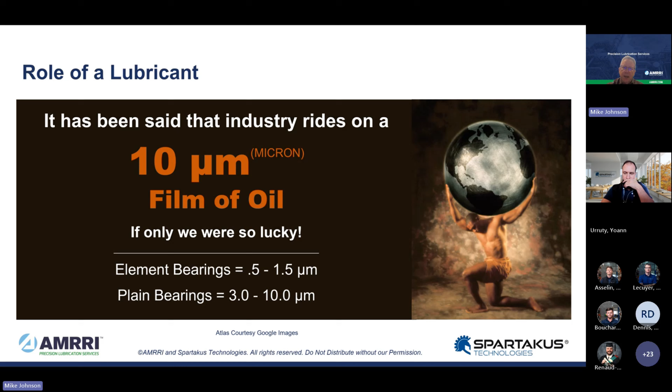All of our element bearings and any machine with rolling contact actually survive on an oil film between half a micron and 1.5 microns thick. Journal bearings and sliding surfaces get a relatively more luxurious 3 to 10 micron thick film—both precariously thin layers of protection. The reality is that we are attempting to float our industrial world on an oil film that's the thickness of a red blood cell.

On the one hand, that does work and we get plenty of benefit from it. On the other hand, it is a fragile film.

The activities of your folks at the plant site, whether lubrication technicians, mechanics, or operators with the oil pail and grease gun, are all about trying to provide a continuous coating of fresh, clean, dry, properly selected lubricant that cushions, seals, and protects machine surfaces from wear and corrosive degradation. If we're able to do that, we win.

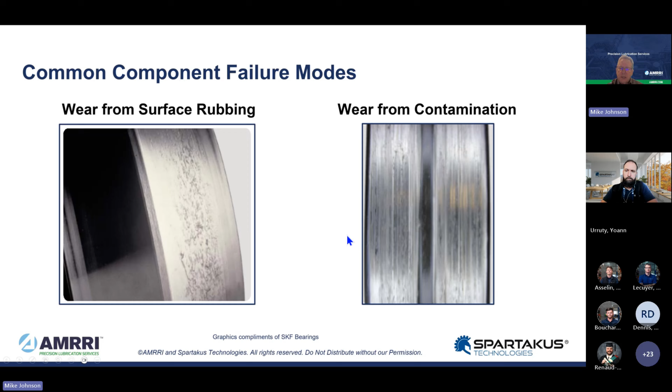If something occurs in our daily care and feeding cycle that disrupts that red blood cell thick layer of protection, we experience wear from surface contacts, bumping and rubbing. That wear debris, which is a contaminant, produces more wear in the form of abrasive degradation of surfaces, all of which leads to fatigue. And depending on the environment, there's also the constant challenge of corrosion of machine parts.

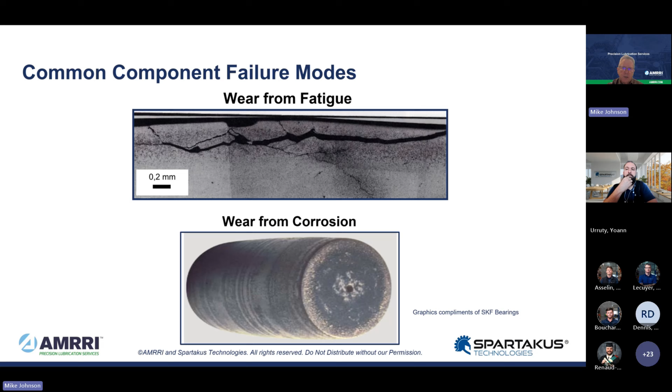These degradation modes all impact our ability to produce. It doesn't really matter whether our losses are scheduled or unscheduled repairs—once time is gone, it's gone, and we can't get it back.

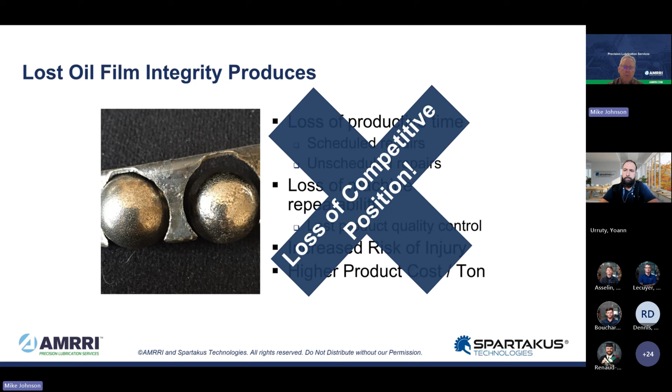With the loss of machine part function, we lose machine repeatability, which can impact product quality and cost control. We have increased risk of injury anytime we are scurrying around trying to accomplish repairs—urgent work makes for higher risk of injury. All of that amounts to higher product cost per ton of whatever we are producing, and that erodes our competitive position in a super competitive industrial world.

Our component suppliers are well aware of the predicament we face. Per SKF, they look at premature bearing failure as bearings that don't reach the L10 life cycle, and attribute 57% of those failure instances to something gone wrong with the machine lubrication approach. Inadequate lubrication is kind of a bucket of excuses.

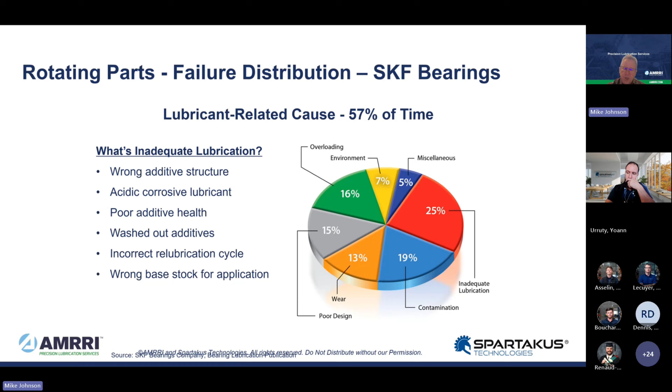Contaminant specifically refers to sump pollution. Wear specifically refers to degradation of machine surfaces due to the lubricant not having the guts to provide protection as expected. FAG, Schaeffler FAG bearing says, wait a minute, not so fast.

It's actually worse than that. Per Schaeffler FAG, lubricant-related cause shows up in 80% of instances of premature bearing failure, in the form of liquid and solid contamination, insufficient lubrication, unsuitable lubricants, or lubricant left in the machine for too long a period of time. These are basics we should be attending to with our daily care and feeding programs.

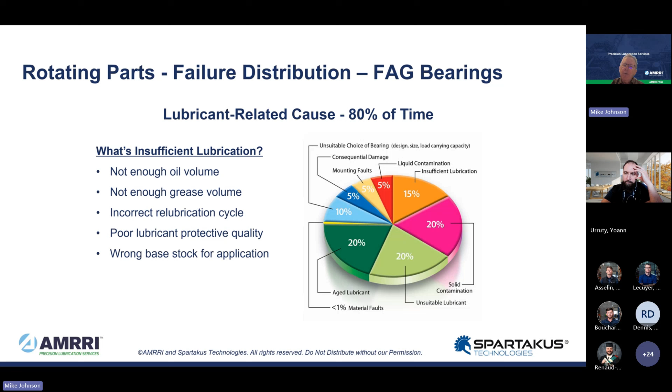Whether it's 57% or 80%, I don't know. But if both of those numbers are wrong by half, it still represents a controllable failure mode, and we have the means to do something to change that outcome. The failure modes we face are measurable, predictable, and avoidable.

We can control those challenges we face with routine operation of the machine. Okay, so now the question: so what? With all the things we have to do on a day-in, day-out basis, why should we put a lot of time, effort, and energy into trying to make machine lubrication work plans better?

What's the benefit? Beyond that, what should you expect following deployment of a reliability-focused machine lubrication work plan?

Reasonable expectations: a 25% reduction of lubricated machine parts over a 3-year period, with a big, hairy, audacious goal of 50% reduction in lubricated machine parts. And with all of those machine parts, any labor associated with repair, any contract labor associated with repair, and certainly reducing the risk of planned or unplanned outages.

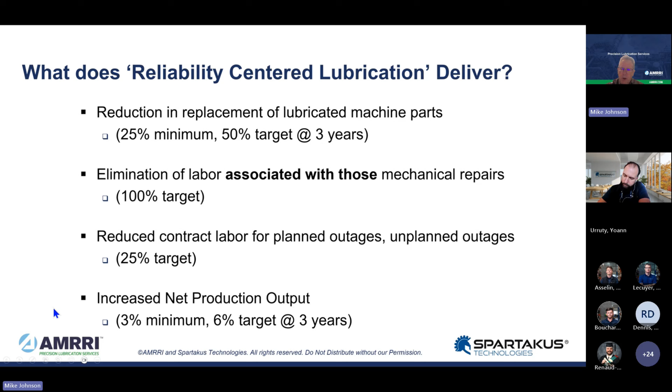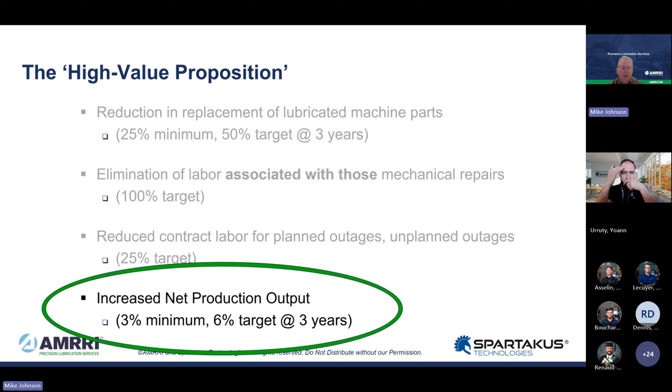Ultimately, while these top 3 bullet points justify the effort it takes to make a lubrication plan, our focus ought to be on improved production output, improving the productive capacity of our operating complex. A 3% minimum over a 3-year period is entirely reasonable. If we can reduce failures enough to add 3% productive capacity back to our existing effort, the net benefit changes our competitive position entirely within our industry, whatever it is we're competing in.

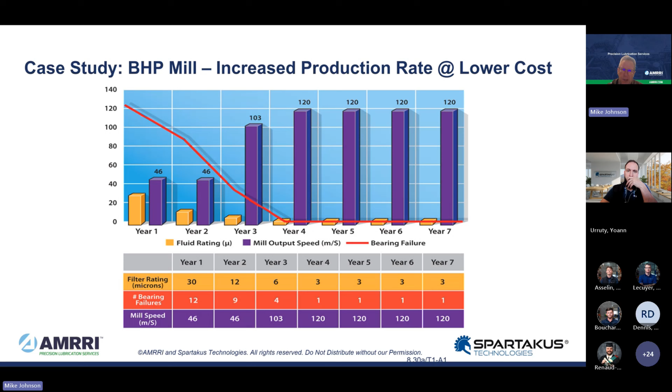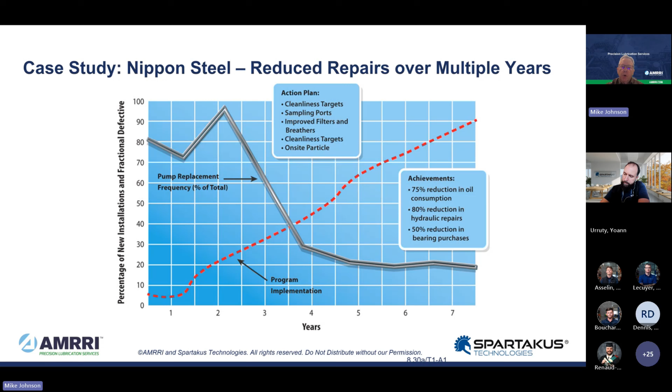Perhaps it's just hard, cold dollars. Here's a study showing 3 years following an overhaul of the machine lubrication program. The work was done in 2015, and benefits were accounted for in '16, '17, and '18. Our financial teams are interested in the power of the investment in terms of returned money. So the bottom line: 3-year improvement expenditure was $500,000, 3-year estimated savings were $8,800,000 - a 1,553% return on investment. Sometimes it's just about the money.

Machine lubrication work practices improvement is truly a best-buy industrial cost savings opportunity.

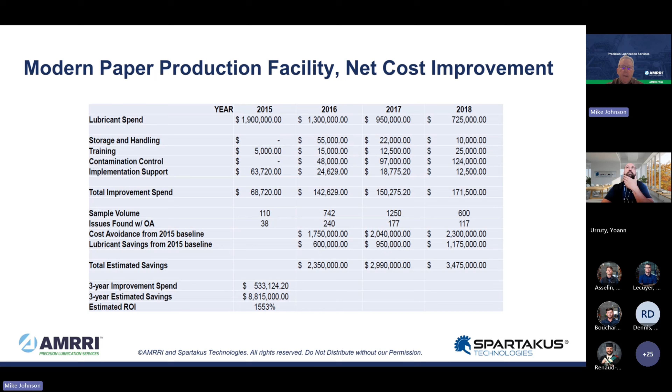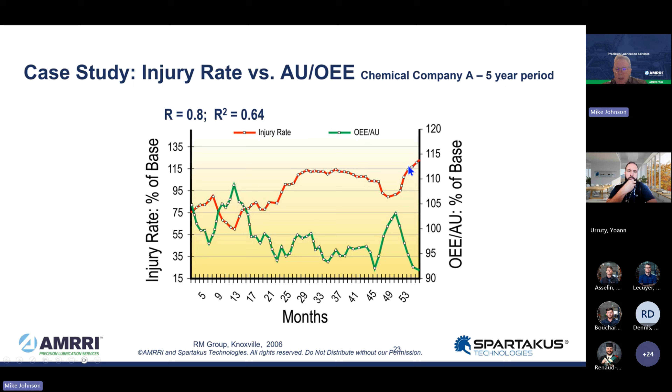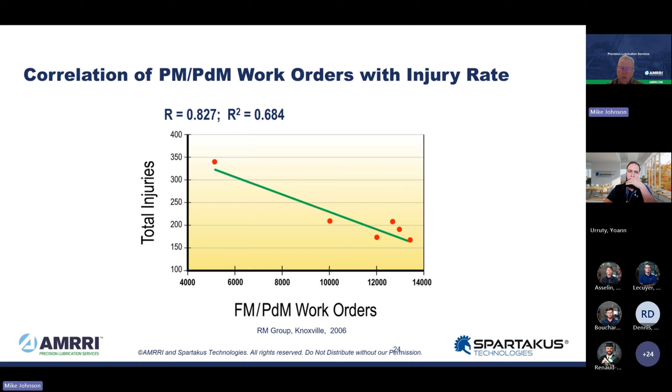There's also a safety improvement element - a well-established relationship between asset utilization, the green line here, and injury rate risk. We know from plenty of examples that as asset utilization improves, the risk of injury declines. This chart shows the opposite is also true: as asset utilization, measured by overall equipment effectiveness, declines, the risk of injury increases. There's a strong correlation between PM/PdM work orders, such as machine lubrication, vibration data collection, and inspection, with minimizing risk of injury, and a strong correlation between reactive work orders and increasing the rate of injury.

As you think about these potential benefits and your competitive position, and your work injury incidence rate, you've got to holistically look at your whole maintenance program and ask: what is our system providing for us? Per W. Edwards Deming, your system is designed to give you the results you get today. If you want different results, you've got to think about the system.

So with regard to improving machine reliability and overall maintenance through lubrication program development, it's a step-by-step exercise. None of this is necessarily easy, but it's all entirely accomplishable. Step 1: measure the current state of affairs.

Step 2: build a plan following that measurement, come up with a plan for development, and then step into that plan. Often, for the purpose of our presentation today, it involves taking a fresh, hard look at what products we've selected, how often, how much, and how we'll go about conducting daily care and feeding of our machines.

Step 3: use an oil-based sampling program to create a feedback loop, giving us an understanding of whether we've accomplished the objectives defined in Step 2. Step 4: make necessary capital improvements - there's a lot that can be done at very low cost to improve overall reliability of the machines. Step 5: consider upgrading the overall knowledge base of folks involved in this operation of our maintenance routines.

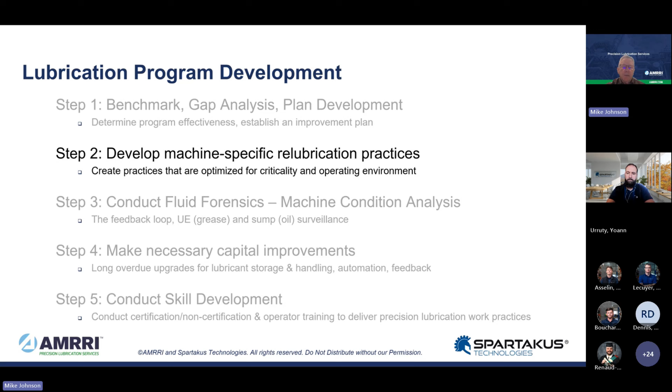Let's focus on Step 2 for a bit. When we step into reorganizing the machine lubrication care plan, you've got to realize it's a detail-intensive activity. We're going to gather a lot of information about the machines, their components, size, shape, speed of components, and operating context. We need a way to manage this large amount of information that will drive the decisions we make to improve things.

Secondly, whatever we come up with needs to be focused on machine health first, and the lubricant choice second. Traditionally, lubricant vendors have provided these kinds of work activities, and as it is their right and responsibility, it tends to focus on what lubricant goes where. But a thorough machine lubrication program goes well beyond just what lubricant goes where.

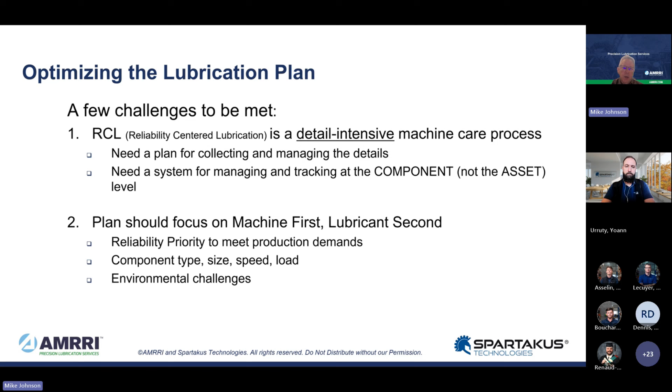So we start thinking about the machine, we have to dig into the machine details. What details do we need to build a new plan? And then beyond that, as we think about the details, we should ask the question, how much time do we need to accomplish these details that we're going to be presenting as a new basis for daily care and feeding?

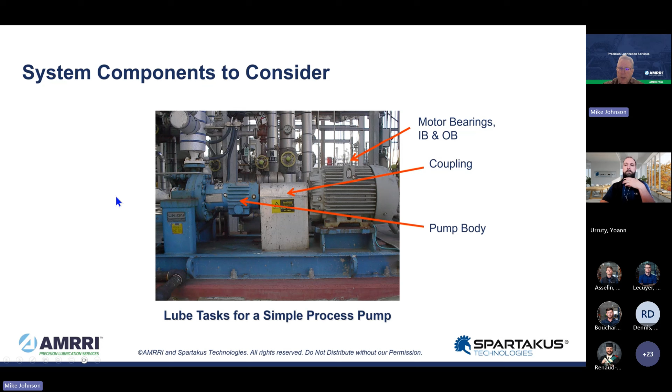When we start to tabulate the tasks that must be completed for any given asset, we look at the sub and sub components. We've got a motor that has two bearings, and let's assume just on average, we're lubricating the motor bearings twice per year. So we have 4 events, and each event requires a time allocation. The coupling, 2 events per year, and a time allocation for those.

The routine level check and top up, it's very common for folks to do level checks on a weekly basis. So we get 52 events, typically getting a 2 to 3 minute time stamp. The sample exercise, if it's a critical machine, we should never push it out beyond 3 months. So let's say we have 4 samples per year, and then eventually an oil change factored in.

A simple, single, critical process pump could tabulate 63 tasks in a given year. We need to allocate a timestamp for each of these tasks and then multiply that timestamp times the number of events in order to know how much labor needs to be set aside for a single critical pump.

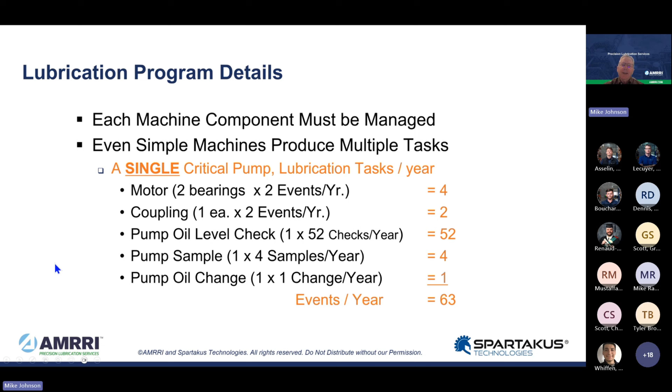A single critical direct coupled FD fan has a different set of components. We've got the motor, we have coupling, we have shaft bearings, and let's say it's a decent sized bearing turning at a decent speed. We end up with 12 visits per year to lubricate each of the 2 bearings, 24 tasks, 30 tasks total per year.

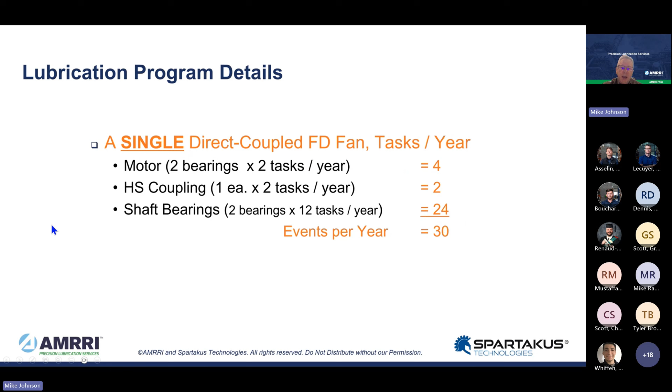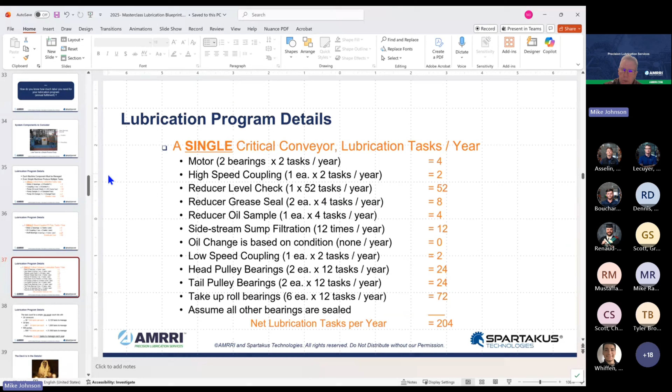A more complex machine, a critical conveyor with all of the various different components. We tally up all the individual task visits to the machine. A belt conveyor can have... sorry about that, guys, too many buttons there, let me put it back in presentation mode. A single critical conveyor can have 204 discrete tasks, each task with a timestamp.

It doesn't take long when we tally up even a relatively small operating deck, 30 conveyors, 30 fans, 500 pumps, not a very big facility, but we see the total number of tasks that pile up over the course of the year: 39,420 tasks. That takes time. Each one of those has a timestamp allocated.

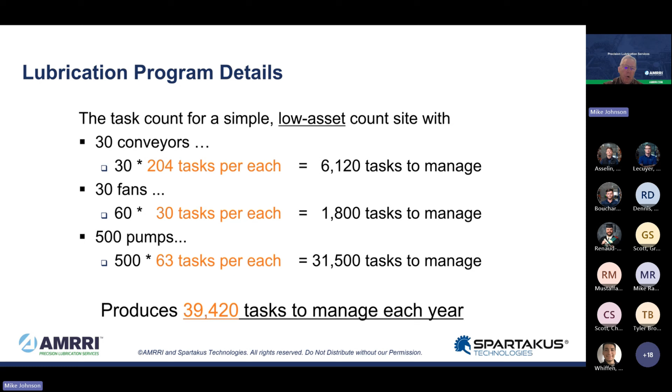Once we have gone through and defined each of the details, allocated time for each of the tasks, we have the means to come up with an annual and then a week-by-week routine labor requirement. The devil is, of course, in the details, and we need to sort through them to come up with a very strong management plan for this task-intensive kind of activity.

So when we go out to look at the machine parts, it's machine first thing, so we'll start with the machines. We're going to create a floor plan that shows where the machines are, and this becomes the basis for the efficient route. We'll record machine name and number, log the individual components by type and meaningful nameplate and design details, and then observe the environmental characteristics around the operation of the machine, since the operating environment has the effect of degrading the lubricant life cycle.

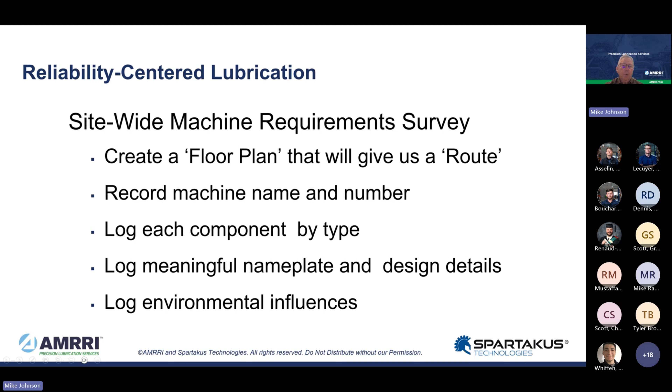So step one, create a floor plan that shows the physical location of each asset. With a floor plan in hand, step two, sit down with the technician and perhaps the supervisor as well, and create a linear sequence representing the route structure that ought to be followed for whatever technician and/or operator is doing the daily care and feeding work plan, so we have an efficient plan. Ultimately, this activity should deliver efficient routes.

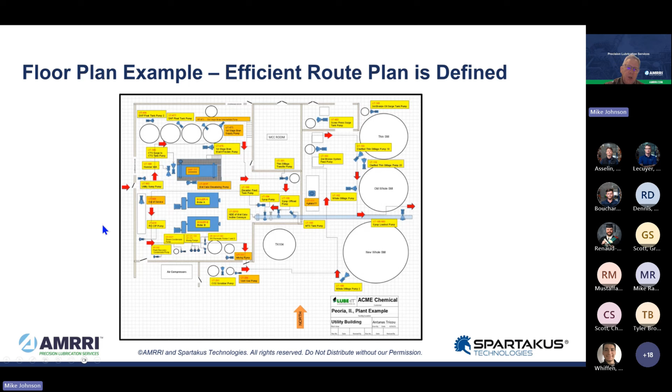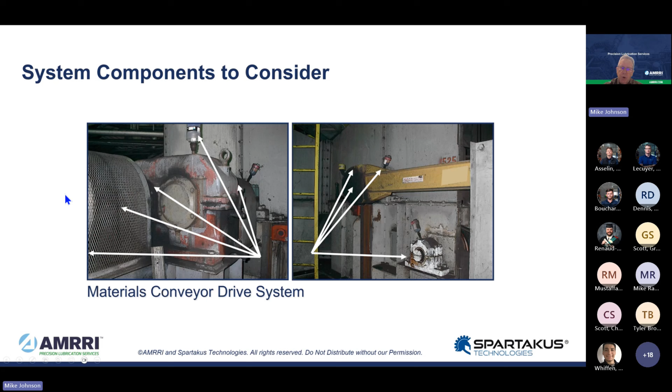Once we have the linear structure in place, we can go back to the machines and collect specific information as needed to identify the care and feeding plan for each component. We've got a motor and a coupling, a gear drive, it's got a breather, a sample port, shaft seals on each side, a coupling to a drive shaft, and on the opposite side, an externally mounted backstop. Each one of the lubricated components in each subsystem of the drivetrain needs to be accounted for.

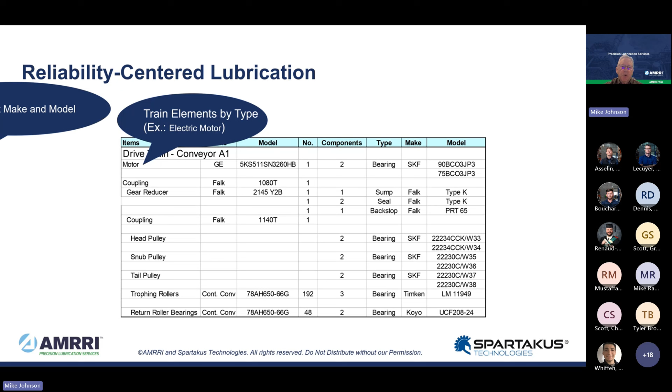The kind of information we're looking to collect: not just the motor, but the number of elements in the drivetrain, who made the components, how many lubricated parts there are for each component, what the component type is, in as much as that defines the lubricant type and chemical family, and then lastly, the make and model number of the components.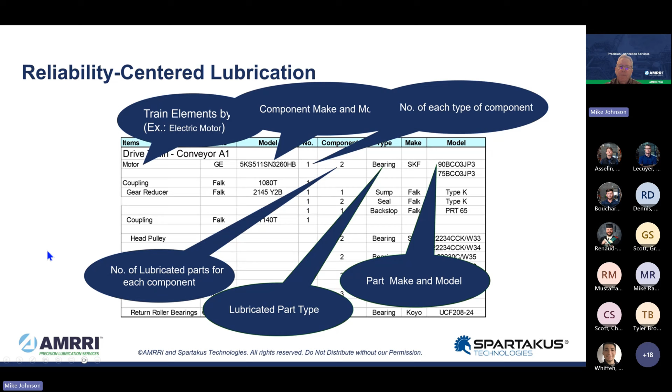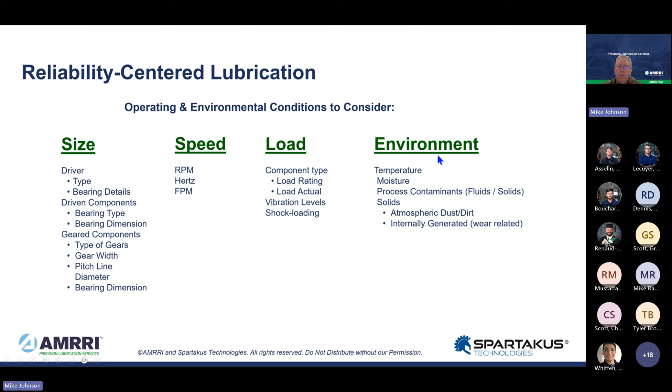This last piece is essential information needed to objectively define what should go into the new machine care plan. We also need to identify, for whatever other component type, the size, the speed that component is working at, and general loading conditions, although we accept that if a component is in the machine, it's the proper component as selected by the machine designer. We're not actually trying to make adjustments in load rating calculations when coming up with a care and feeding plan. And then lastly, the environment where the components are operating.

Mostly the information we use to pull a plan together comes from a physical equipment inspection. OEM guidelines may come into play, ASTM or other ISO standards perhaps, component-specific OEM guidelines beyond the machine designer, builder-specific OEM guidelines—all can have a role, but mostly it comes from a physical observation of the machines themselves.

Let's take a look and see what that actually looks like in real life. Suppose we're looking at a pump. We start with a motor. We observe the bearing numbers for the load side—that's the bearing closest to the coupling—and the opposite side.

These ISO or DIN standard numbers tell us the component type—ball bearing—the series value, and the dimensional characteristic. The last two digits, when multiplied by five, give us the bore dimension. We can then look up this number on a table and come up with all the bearing dimensional attributes needed, which, along with the rotating speed of the asset, will define the lubricant requirements for the component.

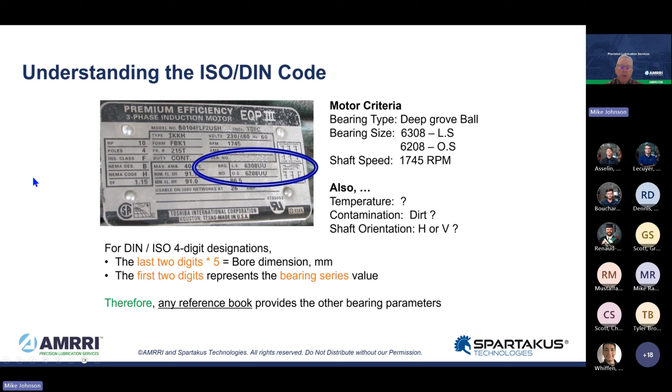So let's walk through this and see what that actually looks like. The first question we want to ask is: is it going to be okay to lubricate this bearing with grease? Oftentimes we have components operating on grease because the OEM said to use grease. In reality, we go to the component designer, run through a simple scenario, and calculate whether that component is going to be safe to run with grease and expect to achieve the net total life cycle or not.

When you look at all of your machines at your plant site, you'll probably find some instances where you have bearings that are grease lubricated that really should not be grease lubricated.

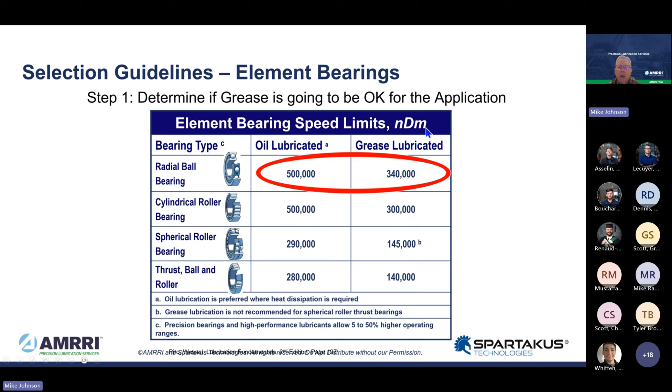Step one, determine if grease is going to be okay. To do that, we find the NDM: shaft speed times the bearing's median diameter. The details come from the bearing itself. For the bearing furthest from the coupling, 40 millimeter bore, 80 millimeter OD, added together and divided by 2 gives us the median diameter, times the shaft speed, gives us the speed limit for this particular operating bearing.

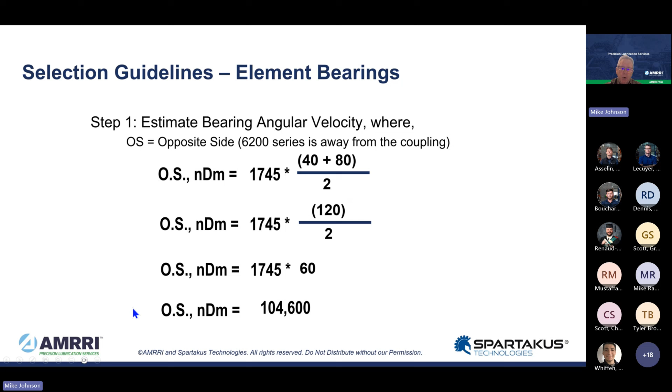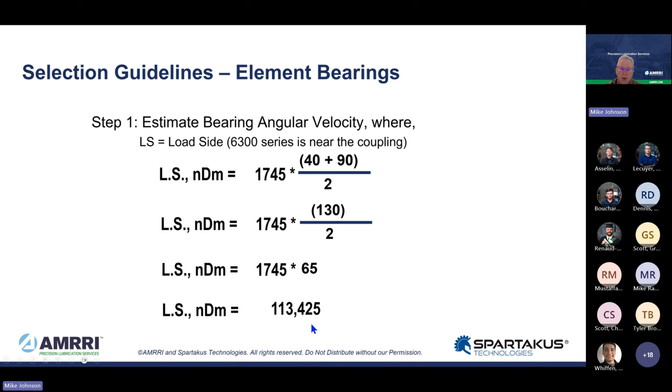Do the same thing with the bearing closest to the coupling, the 6300 series bearing we looked at. We compare the numbers we see, 113,000 being the highest, to what is considered tolerable for ball bearings, and it's a pass. As long as the number we come up with is below the speed limit value, it's safe to lubricate with grease.

We notice there are different numbers for each of the other bearing types, so there's no single number for all ball bearings, for instance. It's specific to the operation of the bearing.

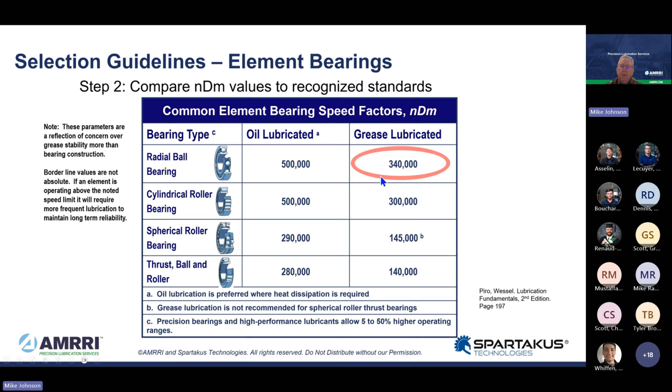First question: is the speed acceptable for grease? We compare our actual NDM value to the speed limit given by the bearing manufacturer, and we come up with a decision.

Step 2, step 3. Now that we know it's safe to lubricate with grease, or perhaps even if it's not, we have to figure out what the kinematic viscosity should be for the operating conditions we face. The minimum allowable viscosity is 27,878 times the shaft speed of the machine to the negative 0.7114 power, times the bearing's median diameter to the negative 0.52 power.

This formula comes from the bearing manufacturing community. We run the numbers and come up with a minimum allowable viscosity needed to make the bearing elements float in the races. We round it, then multiply by 3 because we don't like drop-dead viscosities — we need a little fudge factor, some room for temperature excursion. So we multiply this minimum by 3 to come up with a target.

That's step 3. Step 4, we look at the lubricant in use. Let's say it's Chevron SRI electric motor grease or Polyrex EM electric motor grease, two very common, very good quality electric motor greases. They have an ISO 100 viscosity grade base stock used to make the grease.

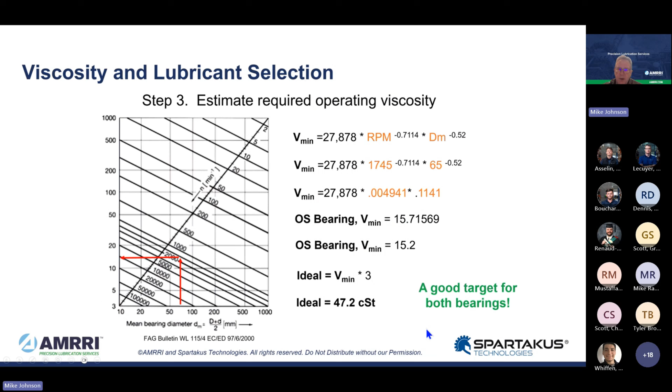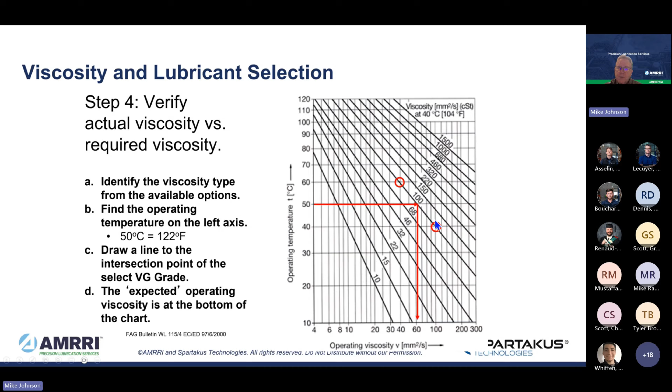Let's say the operating temperature for this pump or fan bearing is 50 degrees C, 122 degrees Fahrenheit. This grease with an ISO 100 viscosity grade base stock at that 50 degree temperature gives us 60 centistoke working viscosity. Previously we said we need at least 47.2. We have 60 centistoke, so we're at roughly the drop-dead point times a good margin. We're in good shape — that means the product picked is fully suitable to give us expected bearing life cycle.

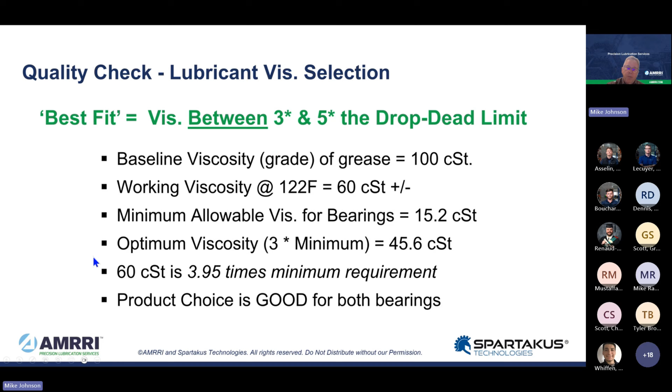A little extra detail: we're looking for a best fit in the lubricant selection decision, whether it's oil or grease. We want a value between 3 and 5 times that drop-dead minimum value. So we look at each product based on its standardized viscosity grade at operating temperature to come up with the value needed to justify that the product we picked is the right one.

Step 5. Now that we know the viscosity is correct for the electric motor, let's extrapolate this to all the other bearings in our facility. Electric motor greases do not contain EP and anti-wear additives as a primary focus, whereas your rank and file general purpose grease is going to be pretty well loaded with EP and anti-wear additives. So you've got to decide whether any bearing you have operating out there should be fed with EP, AW additives, or, per the bearing manufacturer's preference, just operate with an R&O chemical family.

The deciding factor becomes that drop-dead viscosity calculation we talked about. If we can pick a product at operating temperature that is on the right side of this drop-dead line, meaning at least 1 times the required viscosity, then we should lean away from EP characteristics. If, on the other hand, we don't have a choice and know the product we pick won't give us the full oil film needed to float the components, then we consider leaning into EP in order to achieve the expected bearing reliability and life cycle.

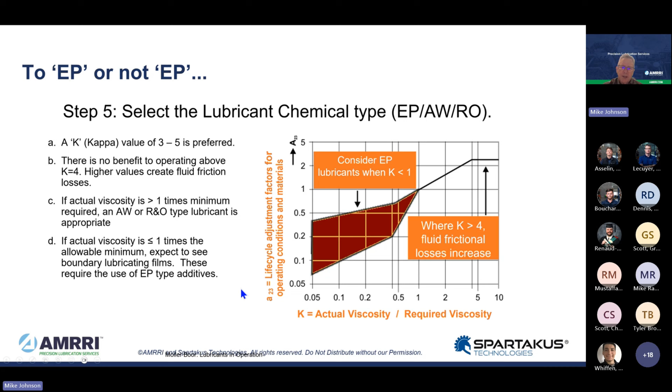Step 6, once we know that the product we picked is the right product and the right chemical family, the next question becomes: how much should we actually apply?

This is not guesswork. Here's a formula provided by SKF that makes it really simple. The width of the bearing in millimeters, times the OD of the bearing in millimeters, times the space factor of 0.005, gives us the volume that should be used to flush out the quantity that exists between the inner and outer race and between the 2 axial planes of the bearing itself.

Dropping in the numbers from our motor, the bearing that was furthest away from the coupling needs 7.2 grams. The bearing closest to the coupling, slightly larger, needs 10.2 grams whenever we decide to feed the bearing.

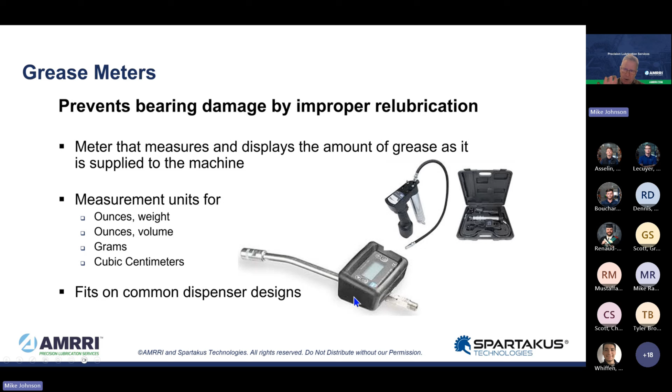The next question then becomes: how often should we feed the bearing? There are a couple different ways to go about validating that product type, that product selection, and the volume is good. We strongly encourage coming up with a set value and then using some kind of a meter to make sure that we are getting to that point and stopping, not over lubricating the components.

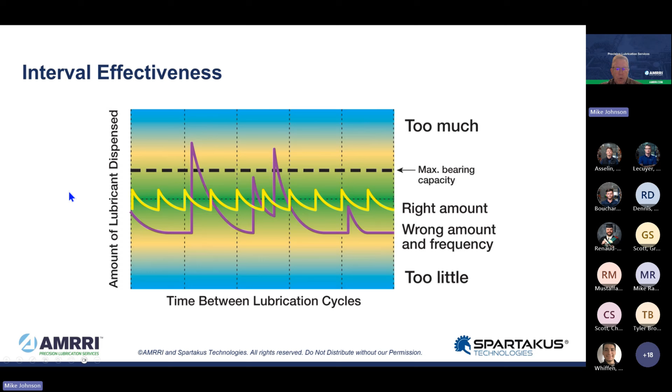The next question then is: how often should we be feeding the bearing? What we would like to have, if it's grease, is a little bit put in very often. Oftentimes we end up with long and non-standardized feed intervals that leave us in a spot between oversupply and undersupply around our lubrication cycles. We really like to have a flat line here, a constant flow, which is kind of what we get when we're lubricating with oil, but not so much when we're lubricating with grease.

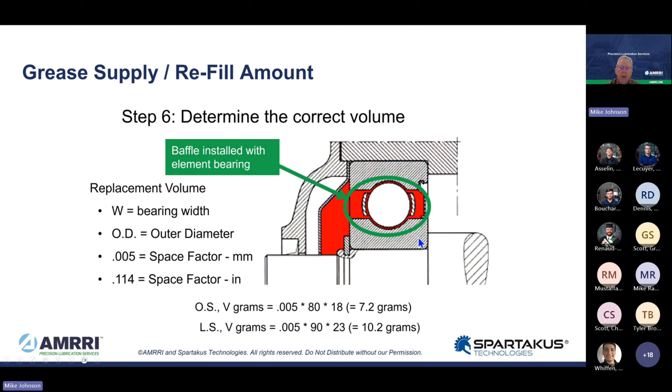Now back to this point: if we think that we need more grease than we're going to get based upon the calculated value, we can always prorate this to a shorter interval, prorate the grease flow according to that shorter interval, and make adjustments along the way.

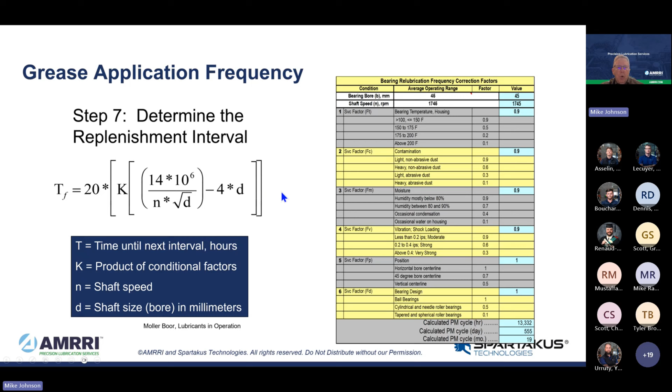Sometimes we have so much water that we need to use grease to push water out of a large pillow block housing with labyrinth seals. We just want to use the grease as a media to push the contaminants away. We don't get the full benefit of that water incursion challenge with the normal calculation, so we rationalize it according to our experience with the components there at the plant site.

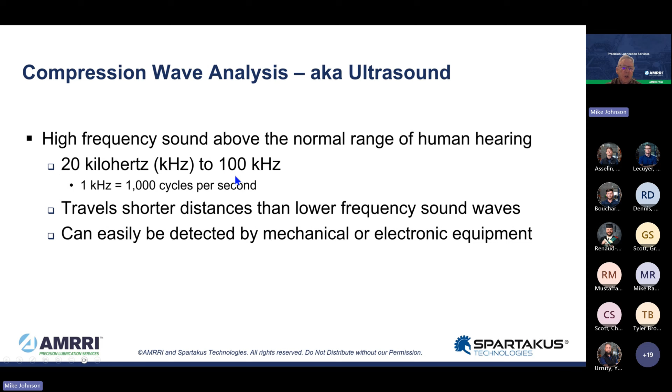Whatever we end up with, we do have the means to use technology to validate our work plan for element bearings. Compression wave analysis, also known conventionally as ultrasound, is a measure of contact energy that occurs between the 20 and 100 kilohertz range. Contact energy is created by impacts.

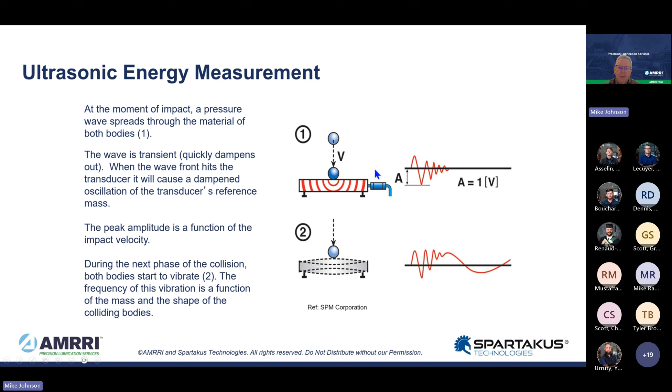Here I'm illustrating what happens when there's an impact between 2 metal pieces. A compression wave is created upon the moment of impact, and that can be collected, measured, and tracked. Inside of a bearing, if the oil film gets too thin, the asperities that exist begin to bump and rub. This creates contact, and that contact can be measured. The thinner the oil film, the greater the contact or ultrasound energy is produced.

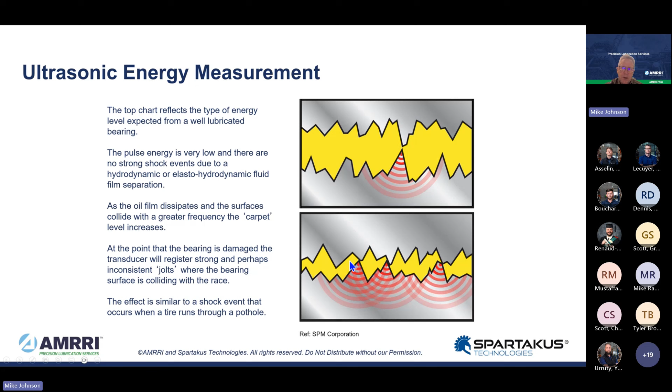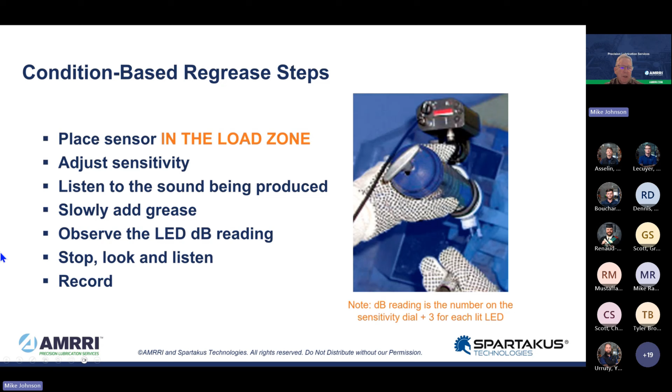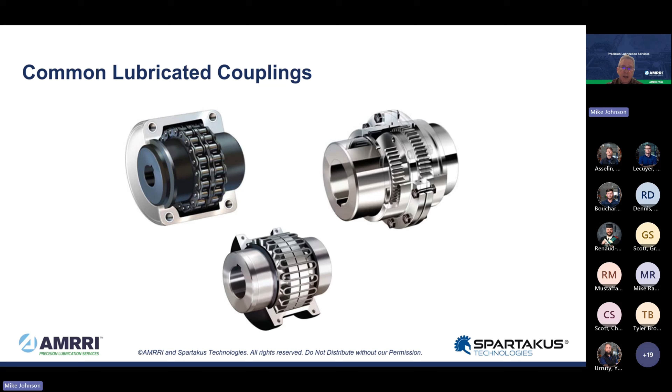This is a fantastic way to go about validating that our lubrication daily care and feeding plan, or weekly or monthly, whatever it might happen to be, is in fact giving the bearing everything that it needs for maximum long-term use. So there's rules for element bearings, there's rules for journal bearings, there's rules for couplings. It's based upon the components themselves.

Here we have a chart showing the centrifugal force that's applied to the grease inside the coupling. We've got a shaft speed defined, and the coupling pitch diameter defined, and even a relatively small coupling turning at 500 RPMs is capable of producing exceptionally high centrifugal forces. That centrifugal force literally squeezes the oil right out of the thickener for the conventional lubricant.

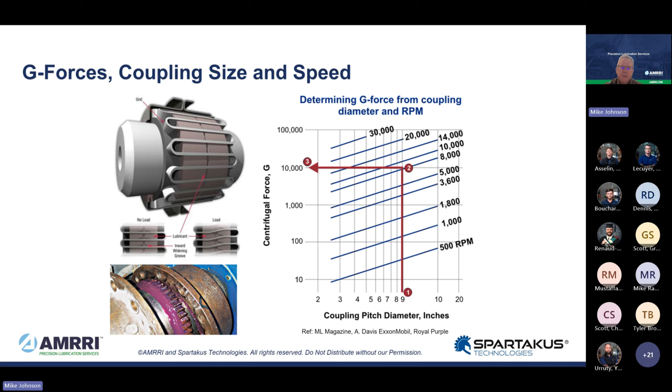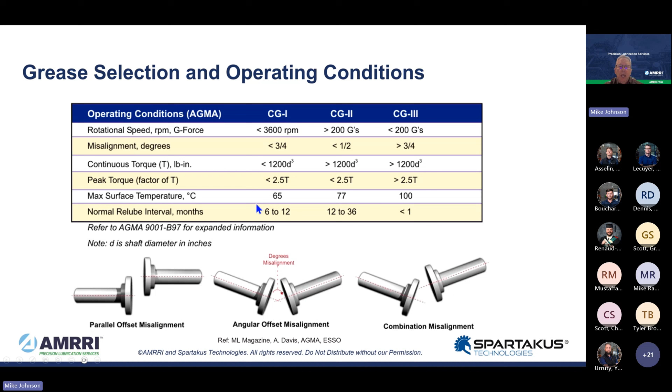So couplings require specialized products. Per the American Gear Manufacturers Association, there are different grades of couplings allowing for speed, misalignment, torque, peak torque, and other conditions. For each of those AGMA coupling grades, there is a grease quality associated with that.

There's also rules for gear drives. Much like the other components, the drive influences the speed with which the gear wheel is turning, and its calculated value is pitch diameter in millimeters times the speed the gear wheel is turning, divided by a constant factor. There's an AGMA standard that gives us elaborate information useful to figure out exactly what we need if that's not provided by an AGMA approved gearbox manufacturer.

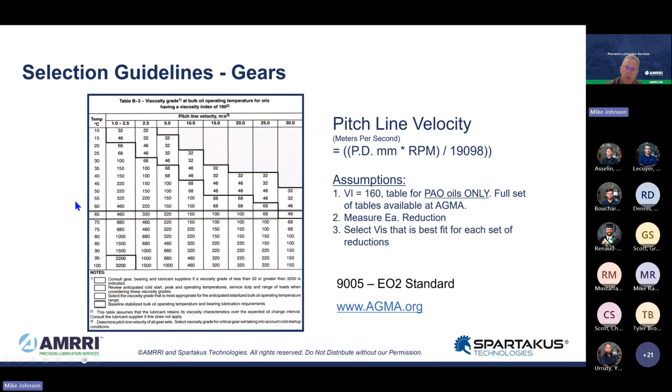Here we have a table, table B3, where we're looking at a synthetic type of lubricant for a given pitch line velocity. We have a viscosity grade. It's a correlation between the temperature of the oil in the sump and the pitch line velocity of a given gear wheel in operation. So it's all very narrowly tied down.

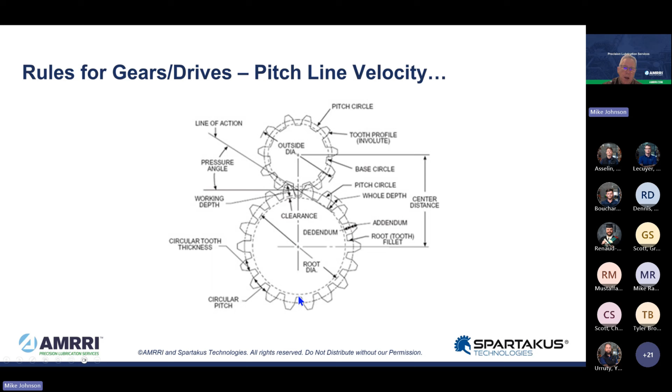Just as a point of notation, the pitch diameter is the gap between where the gear teeth transfer the load, all the way to the opposite side, for the pitch circle. That's the pitch diameter.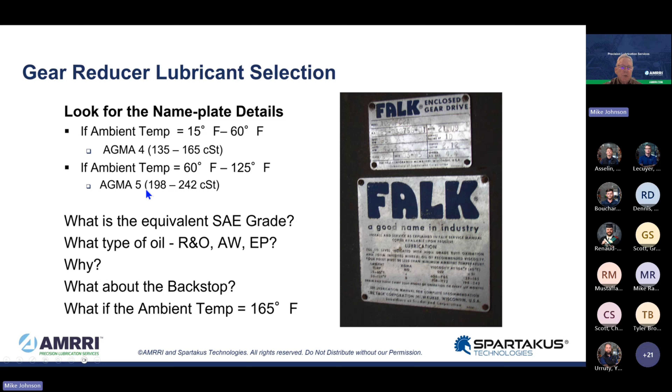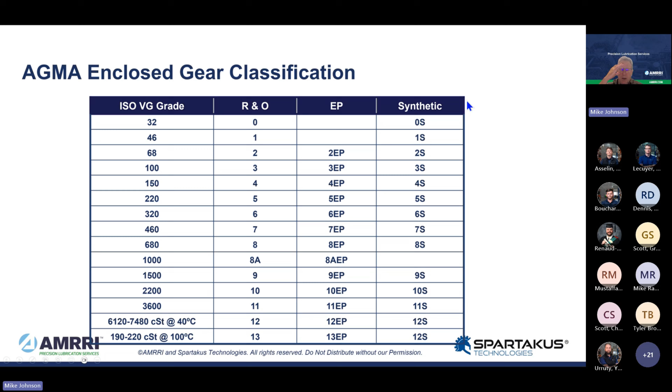Fortunately, our gearbox manufacturers have done a very good, responsible job of putting the calculated information onto the name tags. We get information that looks like this: ambient temperature of 15 to 60 degrees, use an AGMA grade 4, viscosity between 135 and 165 centistoke. If it's a higher ambient temperature, we use a thicker oil, and AGMA provides insight on when it should be R&O chemical family versus EP chemical family, and even when we should lean into a synthetic for optimum long-term gear function.

So there's a bunch of details we have to collect. We collect the details, we run some calculations, and we drop those calculated values into our daily care and feeding plan. Here we have another poll question.

So how objectively defined are your lubrication practices, guys?

Let's see what the answers are. So we've got fairly good predominant for now. Yeah, we're around 60% fairly good practices there, Mike. That's good. And just a couple of you said it is top notch. It's good.

That's great. Along the way, industry is getting smarter and smarter about the value of whatever we got to do to protect that blood-cell-thick layer of protection.

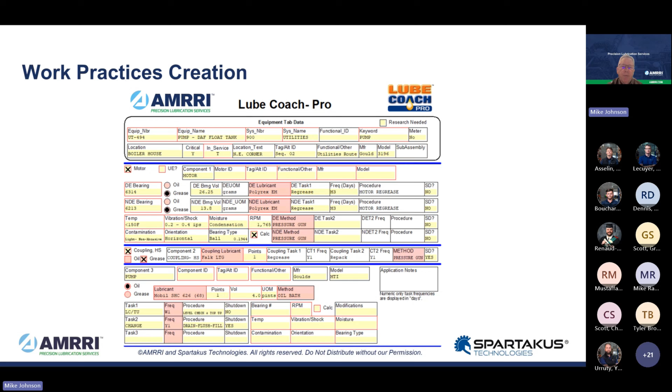For our part, when pulling the details together, like I said earlier, we're going to collect a lot of information. So this is where a computer can come in handy. We have a chart that we fill out that shows us the basic bits and pieces of information that must be collected and aggregated in order to make those calculations and completely objectively define what the daily care and feeding is going to be.

We organize the details, of course, around machine nomenclature, CMMS hierarchical structure, equipment name and number. Then we get into the details: component and additional text to describe the components, the number of components, their capacity, unit of measure.

We don't stick with shots since that's not a standard unit of measure, and there's 200 different grease guns on the surface of the planet with differing values for quantities per stroke of the hammer. So a standardized unit is always the best bet.

The number of locations where that lubricant goes, how it's applied, the product that's in use, manufacturer, make and model number.

Task type: regrease, repack, level check and top up, oil change, the frequency, whether the machine's running or not, the route. Then in the route structure, this is number 1 in the route, number 2 in the route, number 3 in the route, number 4, and so forth. So we build out the routine task requirements according to that dotted line we looked at in the very first step.

The timestamp - you've got to have a time, a duration in minutes for each one of these tasks, which gives us the means to aggregate and come up with an annual plan, and then also look at our weekly to monthly labor requirements, to see if we are providing enough labor to get the whole job done.

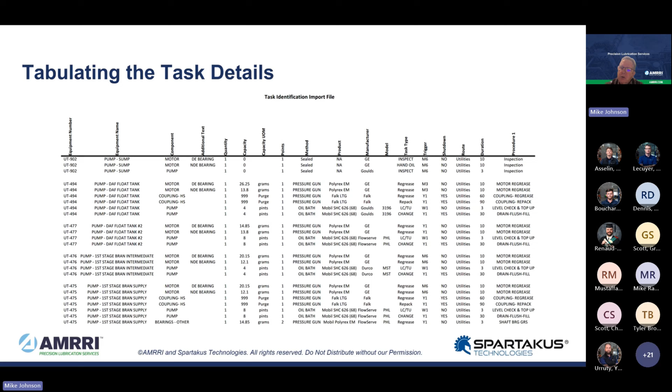And if, when, wherever we can provide a defined procedure for how to go about fulfilling that work, then the newbies joining the crowd, new employees to this work mode, have a basis from which they can expect to get things done according to the company's plan. It's useful to have a task management system.

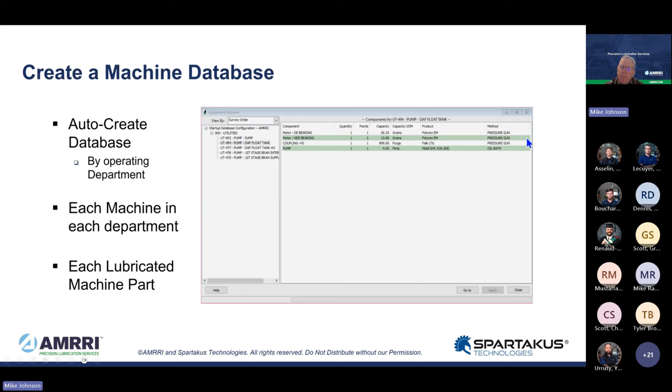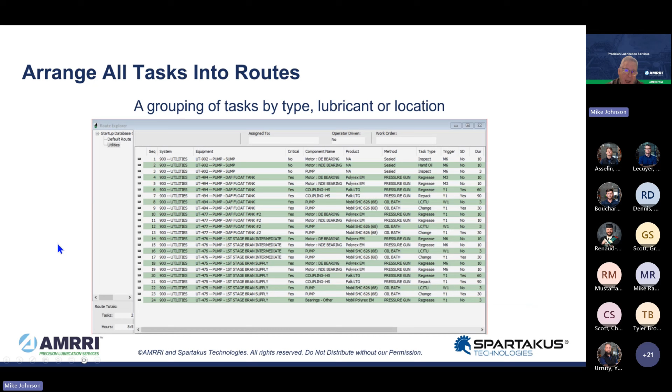Given the great number of tasks that a typical industrial facility has to manage over the course of the year, it's useful to drop it into a computer where we have a hierarchical structure: the department and all the machines in the department and all the details and data fields that can be turned into route statements, statements of tasks to be accomplished, which can then be turned into a weekly scheduling routine where we might have 24 activities scheduled all at one time in a batch. The computer has the means to identify anything that's overdue, identify what's currently due, and even give us feedback and the means to auto-recycle any tasks that get missed for whatever good reason.

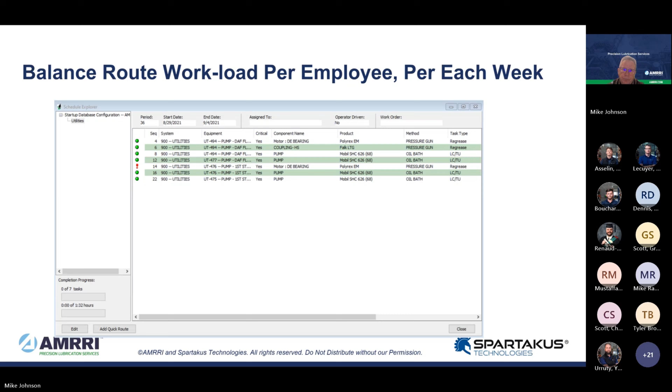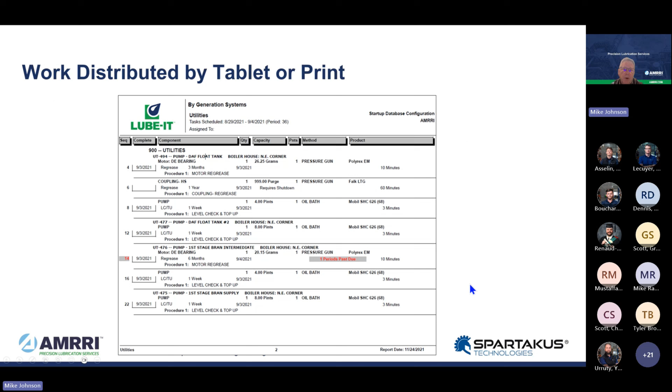The information can be printed out to a sheet of paper or dropped onto a tablet, just depending on user preferences. I'm an old guy myself, I prefer to read a book from a book, not from a computer, so that's just a natural preference for me. There's a lot of folks out there that would just as soon have a sheet of paper, but whether it's paper or tablet, it's just a function of how the information will be provided to the workman.

If you're using a task tracking system, you ought to be able to generate customized reports that give you a very specific understanding of who got what accomplished, who got what missed, who found something that wasn't in the schedule that got accomplished, and these kinds of very important details.

Machine lubrication work quality, the quality of the plan, begs for us to apply a relentless focus on nitty-gritty details. We ought to have robust KPIs that give us the means to track the daily care and feeding of the machines with ease.

Wherever we are, there's always room for improvement. KPIs should revolve around weekly compliance - KPI stands for Key Performance Indicator, in case that's a new acronym to you - oil analysis compliance, including: are we below our contamination control targeted values, and are we within acceptable oil health control limits? There's always room for improving a knowledge base in this particular field.

This didn't become a technical field until 1966. Colleges, two-year colleges, universities, high schools - we don't teach industrial tribology, applied tribology. So this is something we need to learn on the job, and it's vitally important. It's the beginning of mechanical failure prevention.

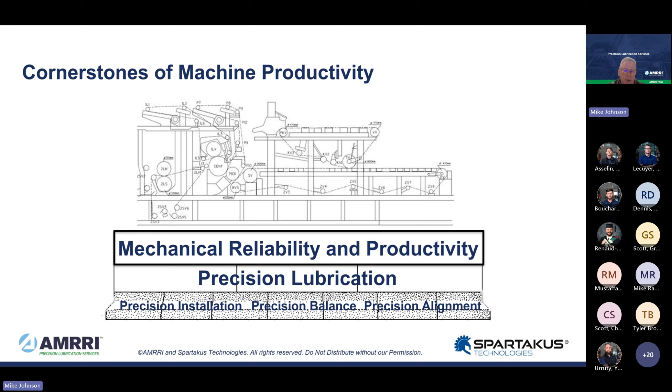But if we forget the daily care and feeding, if we forget to apply another layer of precision lubrication, then this cornerstone activity that we're careful to deliver - much of that value can be lost.

I'm going to step back to the 30,000-foot view here for just a second. I've thrown a lot of details at you, and the details have merit, but let's think about something in very generalistic terms. You have a maintenance budget, and there are major sections of your budget. You've got labor, which is both overtime labor and base labor and wages, and you have materials, which is a combination of miscellaneous things that you use in maintenance, but it's not part of the product, and money that's spent by the purchasing department for machine parts and building parts.

About half of the 40%, the largest line item in the maintenance budget, goes to purchasing parts associated with rotating equipment. So the lion's share - I should say an equal share - of the components value is associated with rotating equipment. You have a small slice in your maintenance budget that pertains to lubricant purchases.

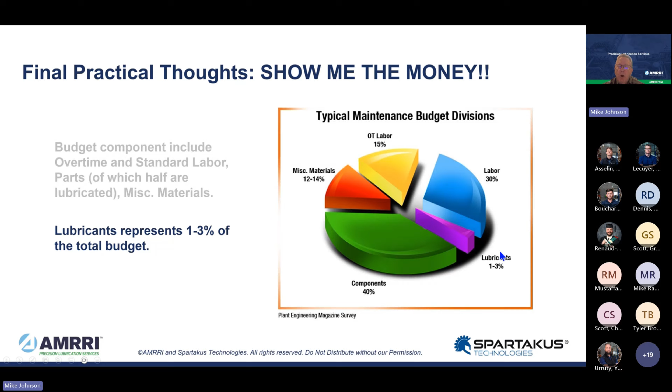If it's a chemical plant, 1%. Cement mill, paper mill, 2%. Steel mill, integrated minerals, mining, processing, 3%. A relatively small proportion of the total. The funny thing is, how you use that 1% directly impacts net base labor and wages, certainly overtime labor, and certainly the money that's spent to buy rotating equipment components. So your 1% or 2%, whatever it is, has an impact on about 35% of your total maintenance cost.

That's called leverage. This ho-hum machine lubrication, daily care and feeding thing, is quite often considered a necessary activity, but not a desired activity. Yet this thing gives you great leverage over the other costs associated with your maintenance activities.

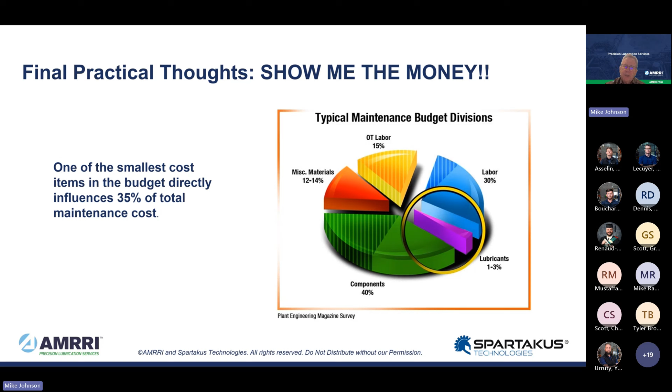Last words here: there's a strong relationship between the quality lubrication program and the frequency of replacement of lubricated machine parts.

If you're experiencing a high frequency of lubricated machine part failures, there's an element of your lubrication program that can be tuned to help you remedy that. Machine lubrication is a fantastic leverage point - 1% of your budget gives you 35% leverage over other costs.

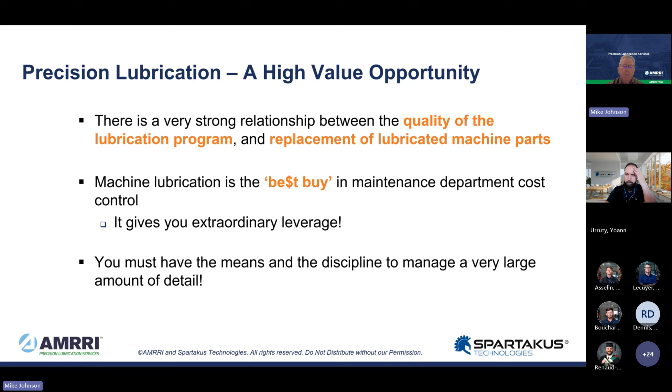You have to have the details and the means and the discipline to manage a large amount of information when you set into this pursuit. Okay, that was a lot of stuff, very quickly, a lot of details.